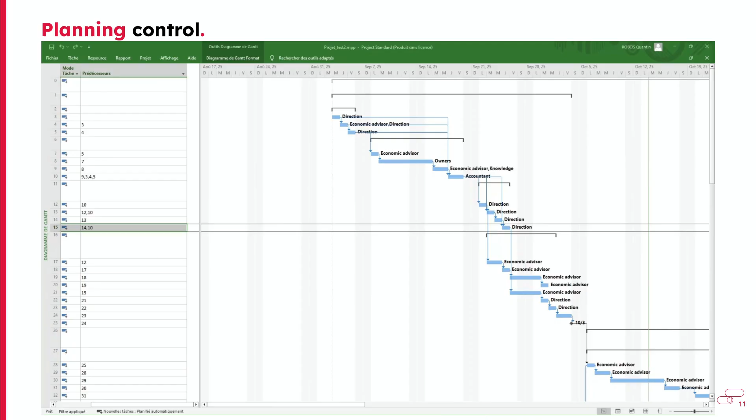If we take a look at the DCMA standard, the logic density rule says it must not have more than 2 predecessors or 2 successors in the planning. So the user uploads the planning, the first version, which has too many predecessors and successors.

We select the workflow which analyzes the planning, and once again the user has direct feedback of the analysis. Once it's finished, the user can access the dashboard, providing all the KPIs of the DCMA standard verification. Here you can see the logic density of the planning is 76%.

We are trying to improve this KPI by updating the planning and removing the overly attached tasks to task number 10, reducing the number of attached tasks to only 2.

As you can see in the dashboard results, if we look again at the logic density value, we managed to increase it by 2%, which enables engineers to improve the quality of the planning by having direct feedback based on the KPIs we have here.

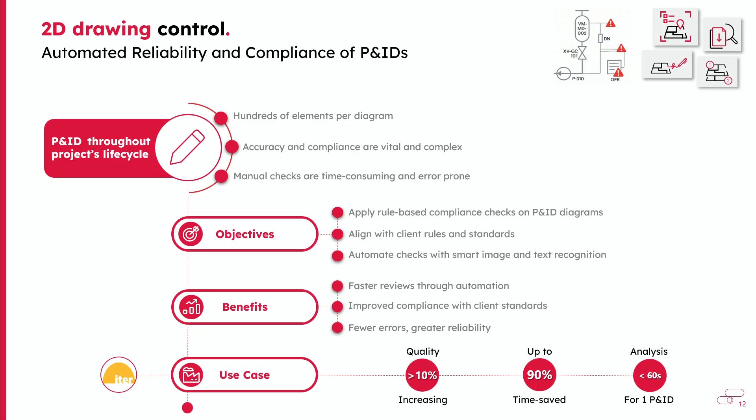And so Quentin, the floor is yours. Thank you. So for this module, we decided to opt for the AI approach in order to verify the 2D drawings that we have. We decided to opt for a vision model in order to be able to detect and classify the P&IDs that we can find in the 2D drawings.

We also leverage the AI capabilities in order to detect missing elements in the drawings and also to be able to extract labels. Once we have the extracted labels, we also have an algorithmic approach in order to make sure that all the labels are well formatted and compliant to the format provided and configured by the users.

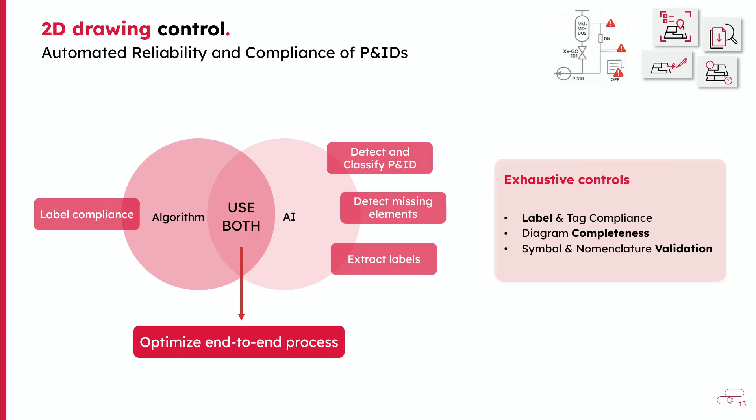We also ensure completeness of the diagrams thanks to AI, by detecting for instance unconnected pipes or missing elements on the P&ID based on the legend. This approach enables transforming a manual task into a systematic process with high reliability, and it helps secure the 2D deliverables. But once again, let's dive into a demonstration to see how it works in practice.

So for instance, you have this kind of 2D drawing. In this one, we have a pipe and a label on the pipe, and we expect, for instance, to have the nominal diameter in the label. The user uploads the diagram into the application.

And once again, we have verification, making sure that no sensitive data is uploaded into the environment. Once the workflow is selected in order to verify the 2D drawings, the user can launch the workflow and have direct feedback of the execution of the workflow.

You can see here that we extract all the information based on AI models, and we're able to run analysis on all the elements detected. As you can see, the platform has found some non-compliances on the 2D drawing.

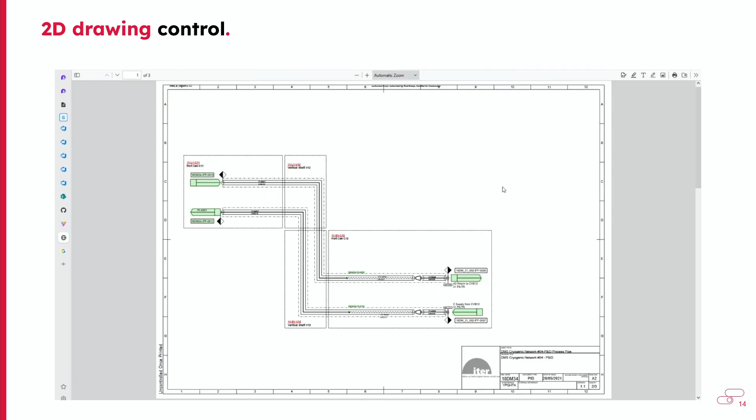The user can now download the annotated file, which is the actual plan with the annotation of the non-compliances detected and where they have been detected in the plan. So here, for instance, as I said earlier, you can see that the label does not present the nominal diameter that was expected in the label.

And as you can see, we are also able to detect other non-compliances that I didn't find with my eyes at first. So I will now let Brice present to you the future of the platform.

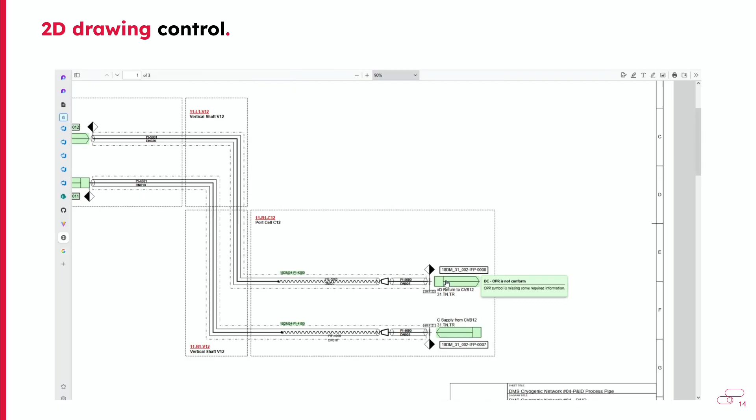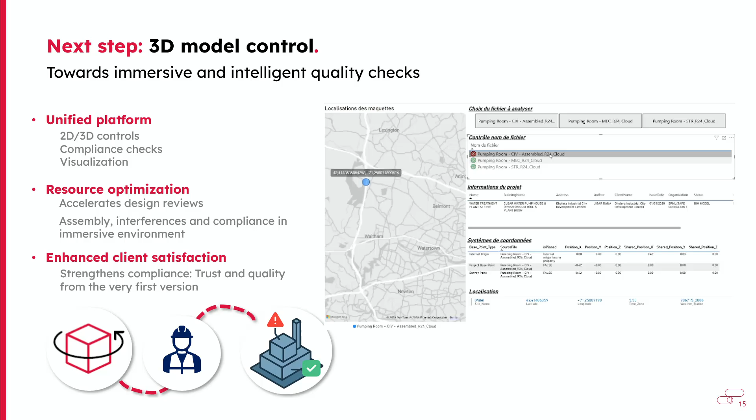Thank you, Quentin. Yeah, the next step of digital quality assurance is here: the 3D model control. This module completes the digital chain of engineering deliverables, from text and schedules to drawings, and now highly-immersive 3D models, moving us toward a unified platform that integrates 2D, 3D control, compliance checks, and visualization.

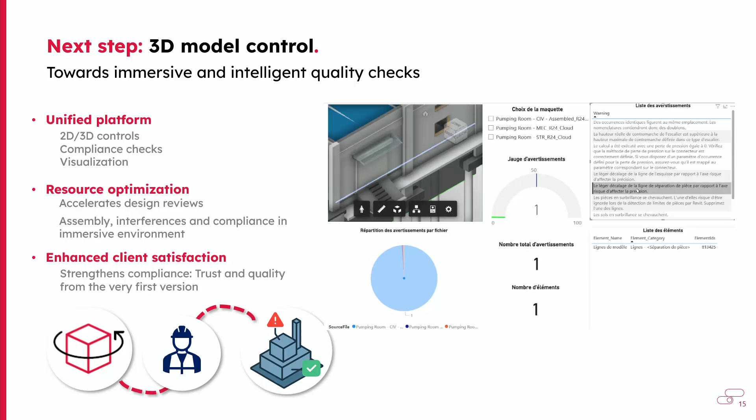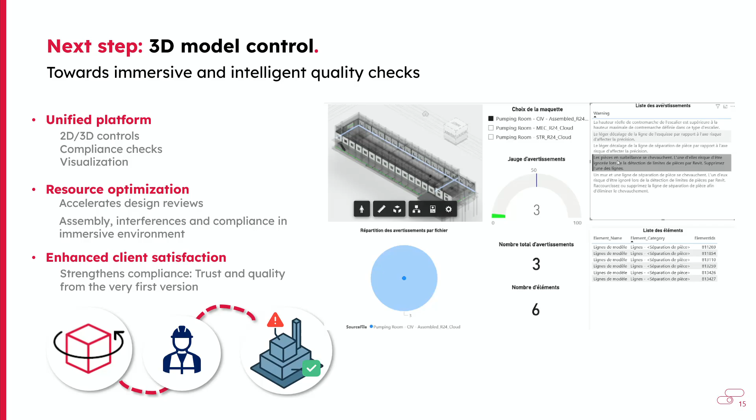This module accelerates design review, strengthens compliance, and gives project teams a clear execution advantage. Beyond visualization, this module enables assembly verification, interference detection, and compliance validation in the immersive environment.

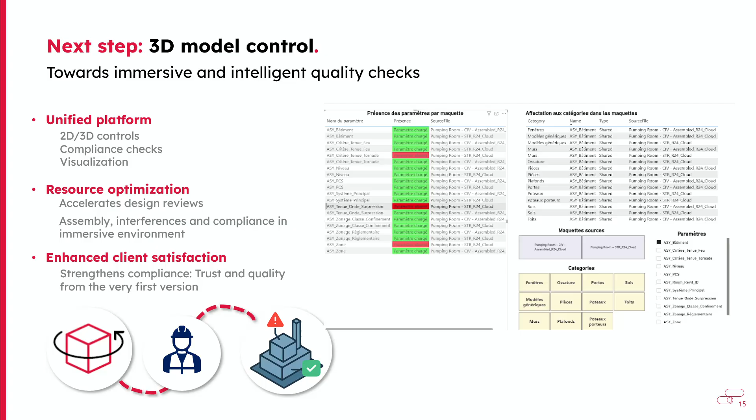The benefits are already visible in our demo and in our upcoming roadmap milestones, with improved reliability, speed, and tangible ROI.

So it's time to conclude. As we've seen, Deep Compliance is much more than a single tool. It's a modular platform that transforms the way we deliver nuclear projects. This solution integrates seamlessly with your existing workflow, freeing engineers to focus on what matters most.

And the impact is real. Across operational projects, we have already measured significant results: up to 60% time saving, at least 10% boost in document quality, and reviews at top speed. This module and this solution empower teams to deliver with confidence, efficiency, and lasting value.

But Deep Compliance is not just a technical solution. Deep Compliance reflects Assystem's long-standing commitment to supporting the transformation of the nuclear industry, building on decades of expertise.